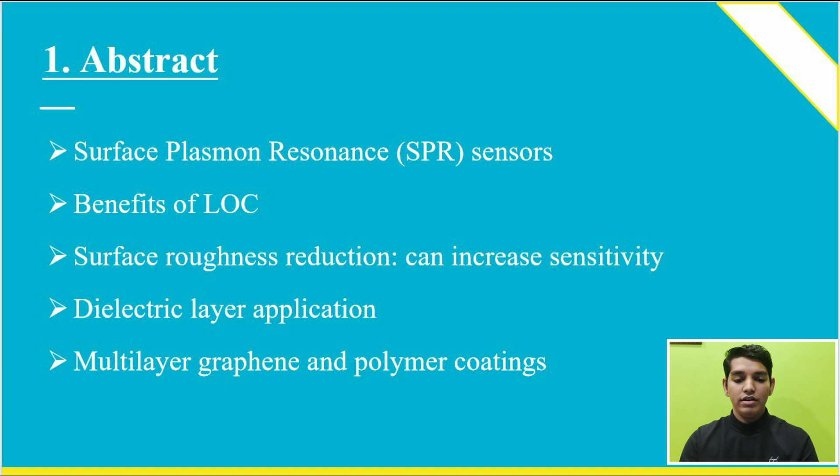This review explores the development of surface plasmon resonance sensors and benefits of LOC, demonstrating how surface roughness can increase sensitivity, and also highlights the application of dielectric layers, multi-layer graphene, and polymer coating.

Introduction. LOC, Lab on a Chip technology, reduces sample volume, automation, and measurement time. Lab on Chip technology is a modern approach to analytical device development, integrating laboratory functions on one chip, which can also help in reducing sample volume, automation, and measurement time.

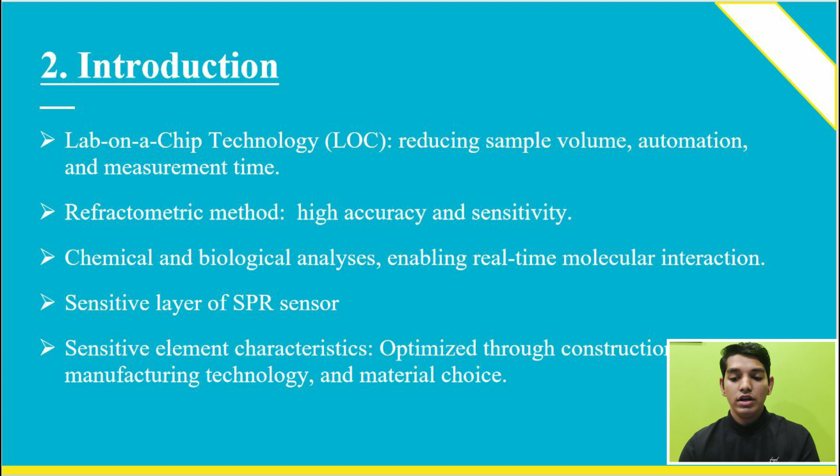Optical methods such as refractometric methods based on surface plasmon resonance can offer high accuracy and sensitivity. SPR also uses chemical and biological analysis for real-time molecular interaction. The SPR sensors consist of sensitive layers that provide a selective response, and the characteristics of this sensitive element can be optimized through construction, manufacturing technology, and material choices.

SPR, or surface plasmon resonance, is a phenomenon where light at a specific angle of incidence results in the excitation of conduction electrons in a thin metal film, for example gold film. This phenomenon mostly occurs in metals with high electrical conductivity and chemical passivity. The light is reflected and detected by a detector, and this detection can be observed through the intensity and angle at which the light is reflected, resulting in a change in the resonance signal.

Core principle of SPR. First, we have the resonance angle, observed as a sharp drop in light intensity at a specific angle due to plasmon excitation in thin films. Second, we have Kretschmann geometry, which involves a prism and metal dielectric waveguide film to provide total internal reflection.

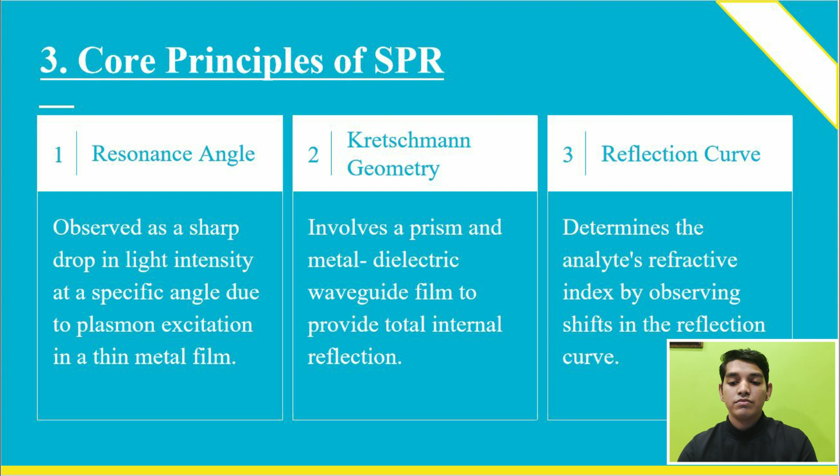Kretschmann's configuration uses a thin film placed on a dielectric layer substrate, and light is incident through this dielectric layer film, allowing SPR to be excited at the metal interface. Third, we have the reflection curve, which determines the analyte's refractive index by observing the shift in the reflection curve.

Mechanism of SPR sensors. Resonance phenomena is the vibration of the metal film when hit by light intensity, and this is how SPR basically works. PCL, plasmon carrying layer, is the layer which observes the drop of reflected light intensity at a specific angle. This layer is typically made up of gold and silver.

The most common method of excitation for this layer is the coupling prism method, which involves two geometries: Kretschmann's and Otto's, used for SPR excitation. The Otto configuration involves a prism and a thin metal film separated by a thin air gap, where light enters the prism and reflects off the metal surface, generating SPR.

Reflection curve analysis is basically the shift in the reflection curve indicating the change in the refractive index.

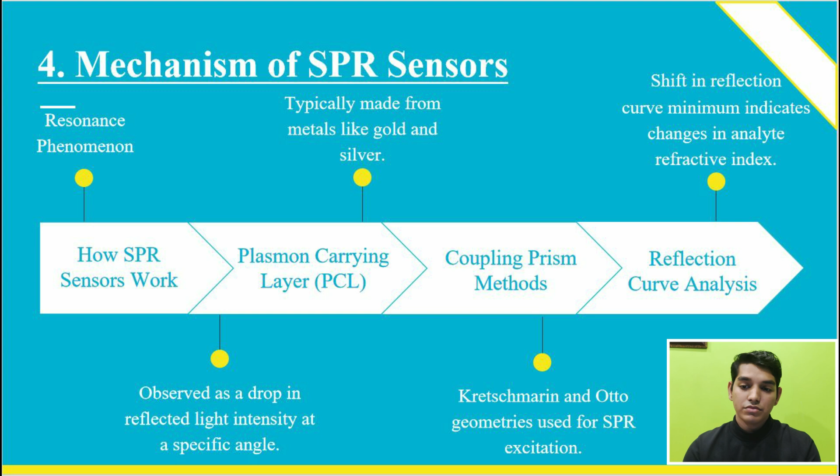Innovative materials and approaches. First is graphene coating: incorporation of graphene for enhanced electrical properties and sensitivity. The gold layer is one of the most widely used for surface plasmon; however, copper and aluminum are not used due to their electrical properties and sensitivity, as they widen the reflection gap.

Nanoparticle enhancements: silver and gold particles improve sensor response and surface interaction. Therefore, silver nanoparticles are applied to gold surfaces using self-assembled monolayers. Gold and silver are the most commonly used surface electrode materials due to their high oxidation resistance and high dielectric permeability.

Polymer layer: the use of polymer layers, namely high frequency plasma polymerization, to increase sensitivity. Waveguide optic fiber: optic fiber with narrow geometries and dielectric layers increases sensitivity.

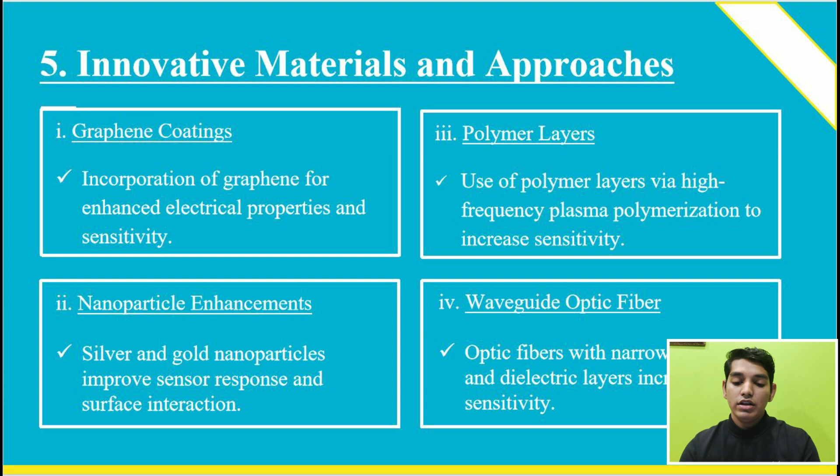Technical advancement: thermal annealing. 120 degrees Celsius is the most preferred temperature for annealing these surfaces, as it reduces surface roughness, which in turn enhances sensor sensitivity and stability.

Deposition technology: the deposition speed and angle influence surface roughness during layer formation, improving sensor performance. This sensor can be based on gold film covered with aluminum oxide, titanium oxide, silicon oxide, and zinc oxide, which provides high sensitivity and accuracy with lower detection limits.

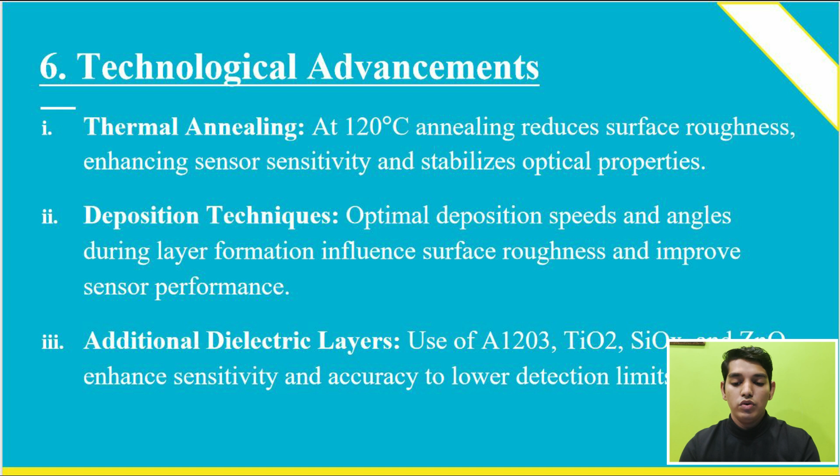Examples of SPR devices: notable models and their functional features. Plasmon series models like Plasmon 6, Plasmon 7, and Plasmon 9 are designed for diverse applications and high sensitivity measurement, with advanced capabilities like Lab on Chip technology, an automation technology which gives features like autonomous operation to devices, leading them to low weight and adopt a modular design.

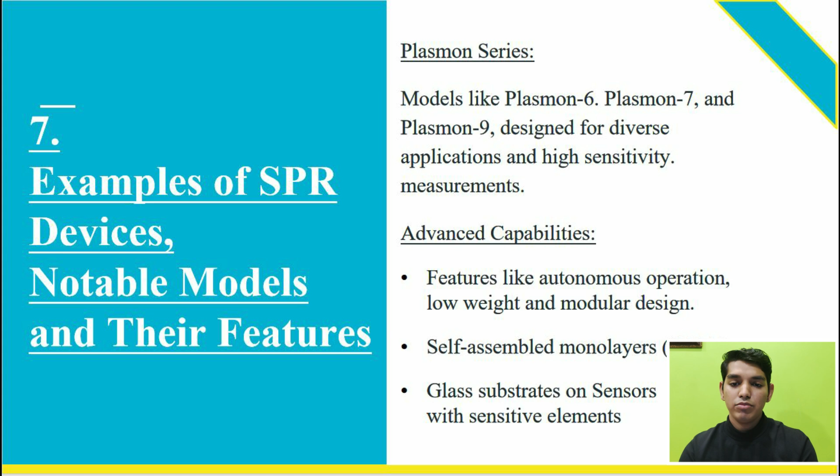Silver nanoparticles on gold surfaces can be applied using self-assembled monolayers, giving them a boost in sensitivity. Sensors with sensitive elements like this are typically located on glass substrates, but polymer substrates may be more promising for biosensor surface modification, enhancing SPR sensor performance methods to improve sensitivity and accuracy.

Decreasing surface roughness enhances plasmon propagation and sensor response. An increase in surface roughness can lead to widening of the reflection characteristic, causing error and affecting the shape of the dispersion curve and the resonance frequency of the surface.

Layer composition: use of porous nanostructured coating, additional layers, and optimal material selection. These additional layers can be used to reduce mutual interference between the sensor surface, and sensitive elements are covered with inner protective layers.

Innovative coatings: graphene and polymer layers, namely high frequency plasma polymerization, for added stability.

In conclusion, we know how surface plasmon resonance works, its mechanism, the methods used in it, and the benefits of LOC. We also learned about dielectric layers, nanoparticles, self-assembled monolayers of nanoparticles like silver on gold surfaces, and about the multi-layer graphene and polymer coating, which provide protection and stability to these sensors.